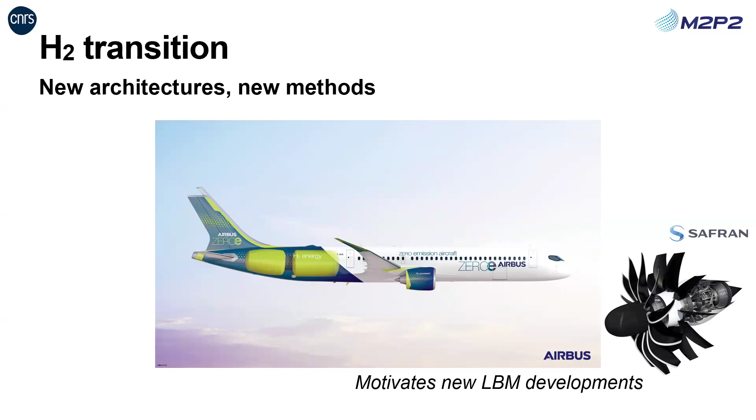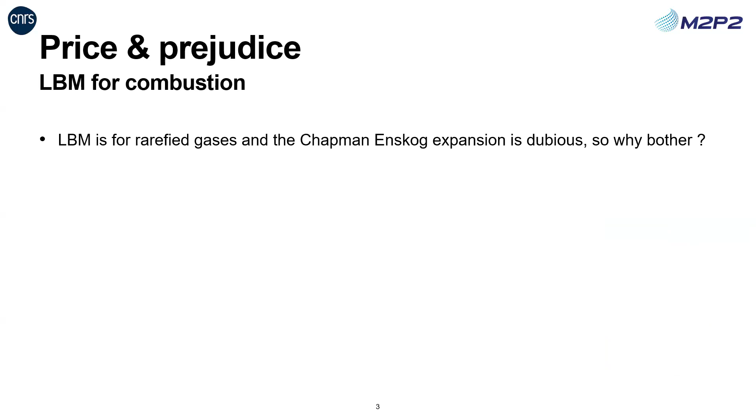Just so you know, introducing LBM in the combustion community is not very easy. So I'm showing you some of the questions I usually get from the combustion part. I'm sure that you're all convinced this is not going to be a problem. Biggest problem is the multi-component part. People don't want to use as many distributions as we need species. Typically, I'm going to show this after, but you can have 10, 20 species that need to be considered.

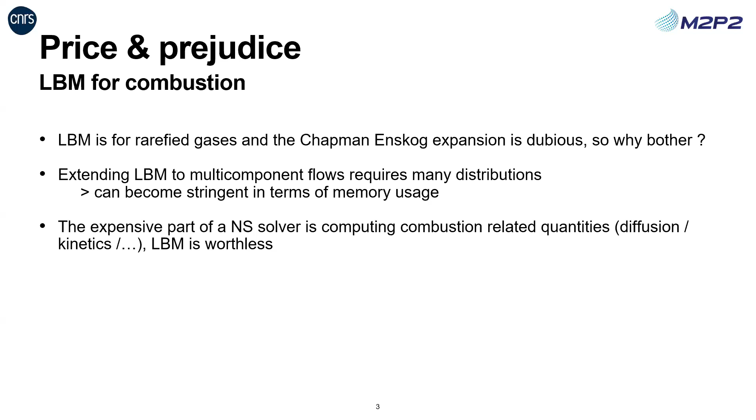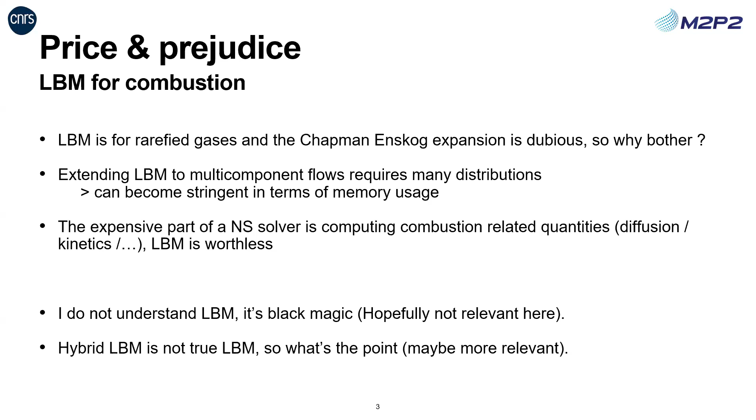Also, a lot of people in the combustion community say that, of course, the expensive part of their solver is solving, in the end, combustion-related quantities, so diffusion, kinetics, and so on. So even if I divide the cost by 10 for the solver itself, it's not going to make a big difference. This is very common, okay? Not going to comment. And this is maybe more relevant here. So I'll try to show some results and maybe convince you, maybe not. So we'll see with the questions.

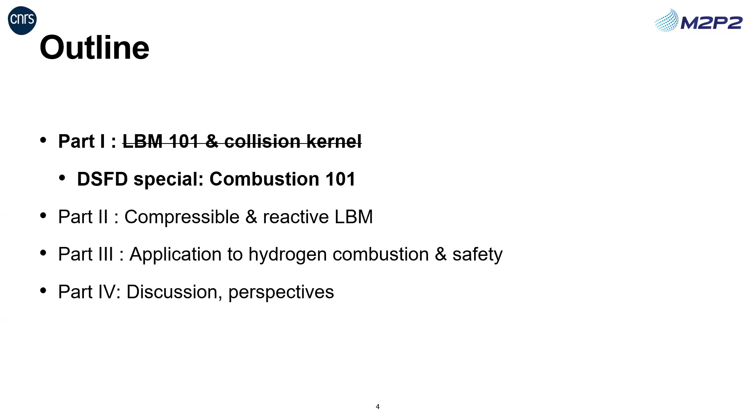So usually I start with a first section about basic LBM, but I'm going to skip it here. And I'm going to do a combustion part instead, just to introduce the equations that we need to solve any problem of combustion. I'm sure some of you know, but just in case. So this is the common equation, Navier-Stokes equation, multi-component. So we have mass equation, momentum equation. This is all the same. You're used to this, the total energy equation, and then we have species equation, which looks like that.

This is the diffusion velocity, which depends on the model, and this is a stiff source term, which we have for each reaction. Thermodynamic closure: we absolutely need, at the very least, perfect gas closure. So we need to have P equal rho T, but unlike compressible monoconstituent gases, we have, of course, a dependence of the pressure both on the temperature and also on the species.

Here I'm introducing total energy, enthalpy. These are the classical notations for combustion. Keep in mind that for combustion, Cp has to be considered dependent on temperature. It's not constant, and it depends on the species. And this is the transport closure. So this is quite classical.

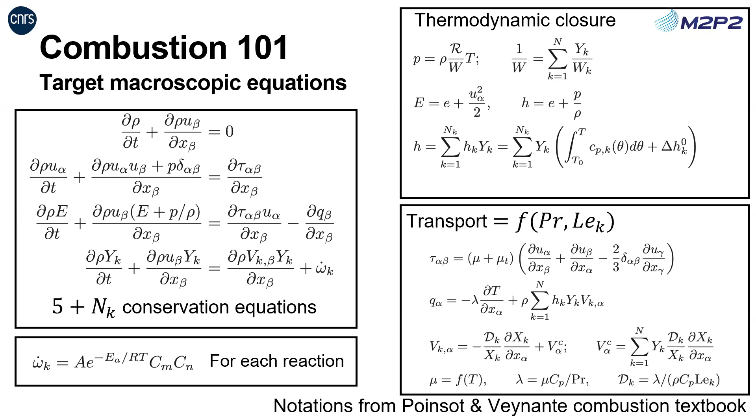Here we're going to have the stress tensor with a viscosity, molecular viscosity, which is also dependent on the temperature. Turbulent viscosity, if there is one, for turbulent applications. This is the heat diffusion. So we have a contribution of the species. Again, diffusion velocities. This is a correction velocity; this is a simple model. I'm not going to go into detail. And in principle, everything is arbitrary and we get it from tables.

So here, just the main difficulties when it comes to LBM. So of course, we end up with 5 plus NK conservation equations. So this is a lot of equations. For hydrogen, typically 9 equations. So we have 9 species for hydrogen combustion for the detailed chemistry, and that's not including NOx and so on. Large temperature and density variations. Of course, dilatable and compressible is non-negotiable, and variable sound speed is also non-negotiable.

The number of reactions can be very high, so 20 to hundreds or even thousands for detailed chemistry mechanisms, 1, 2, 3 for reduced mechanisms, but you know all these terms are Arrhenius temperature-dependent coefficients, so they're very stiff.

And for thermodynamic closure, just to mention this, we have variable Cp. That means that we have variable gamma. This is also mandatory, and we have large molecular weight differences, from 2 for H2, or 1 for H, to typical kerosene, which is going to be 170 or something like this.

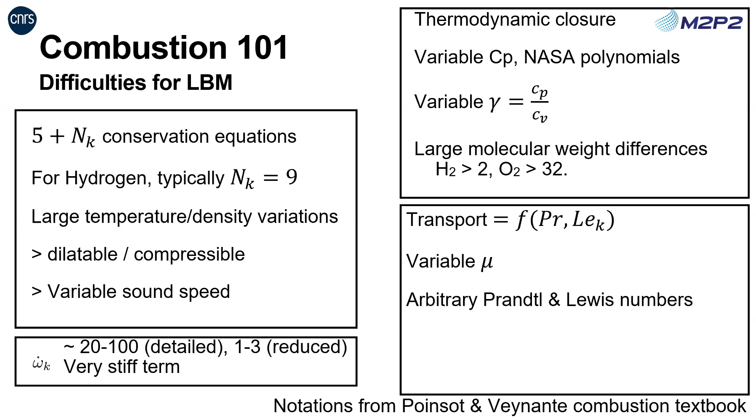Finally, transport. Again, this is all arbitrary, so Prandtl has to be tunable, and usually comes from more complex models. Same for Lewis, especially for hydrogen combustion. Hydrogen has a very specific Lewis. Hydrogen is a very small molecule, diffuses very fast everywhere, and basically changes entirely the dynamics of the flame. So you need to consider this. Okay, so I'm done with the combustion part.

Now I'm giving you the starting point of this investigation. So I work at M2P2. M2P2 is a lab in Marseille, so it's southern France. We're a member of a consortium, which is academic and private, called ProLB, which is co-owned by 2 academic labs, my lab in Aix-Marseille University and 1 lab in Lyon. And then there are 3 big industrials and CS Group, which does the industrialization of the code. So it's an industrial code. It's not as famous as the one that we saw this morning, I'm sorry, but it's a French smaller version.

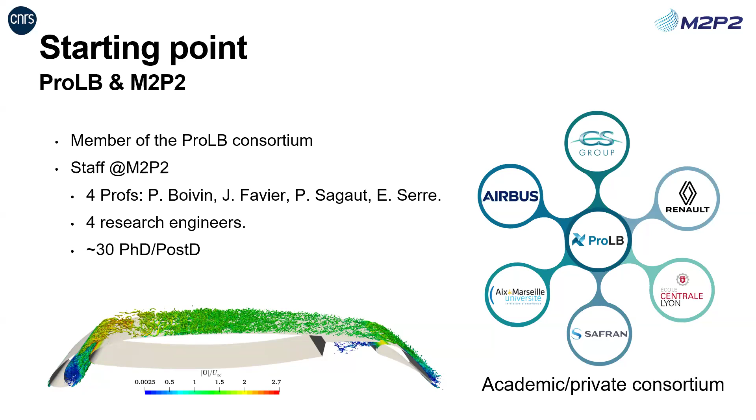At M2P2, we're 4 permanent researchers on the topic and 4 research engineers, 2 of them permanent, and there's a number of PhD students and postdocs. So it's quite an active team. So as I promised, I'm not going to introduce LBM. I'm only going to give you the basis from where we started with the team. So it's a D3Q19 standard lattice.

The code for now is CPU only, but there are a lot of actions in the CS Group to carry it to GPU. The equilibrium function is expanded to order 2 or 3 in the classical isothermal version. And the collision kernel, which is used everywhere in the code, is the hybrid recursive regularized collision kernel by Jacob, Malaspinas, and Sagaut, 2018. I'm putting hybrid in parentheses here because I know a lot of people don't like the hybrid part.

Maybe you saw Jason's talk this morning, but the hybrid part means that basically there's a weighting between the second order of equilibrium, which means the stress tensor, and one stress tensor which is reconstructed by finite volume or finite difference-like schemes, which adds some viscosity into the model, hyperviscosity. But basically, this is only used in industrial applications.

Okay, so in all of the applications that I'm going to show, the academic versions, basically anything that's 2D, we don't use that version. We just use the classical recursive regularized collision kernel. But when it comes to running a full aircraft or a full car or this or that, we use HRR. Okay.

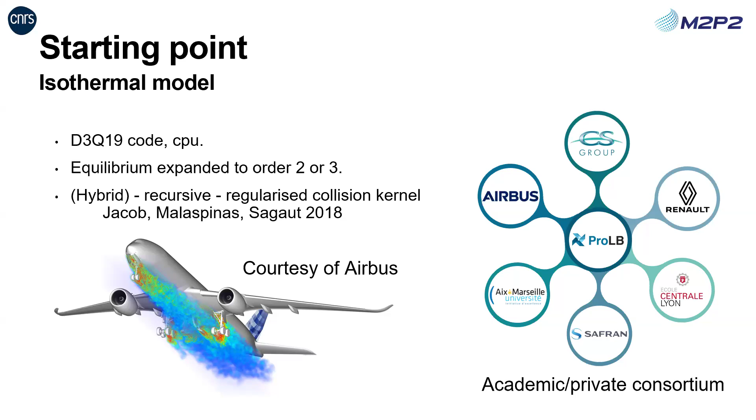Again, I'm going to focus on combustion, but in the lab, my colleagues have different expertise. I'm the only one doing combustion. Some are working on immersed boundary methods. Here we have a big collaboration with the hospital in Marseille to work on fluid structure interaction. We also have collaborations with defense for evacuation problems and pollutant dispersion, atmospheric flows, and so on. But I'm not going to cover this today.

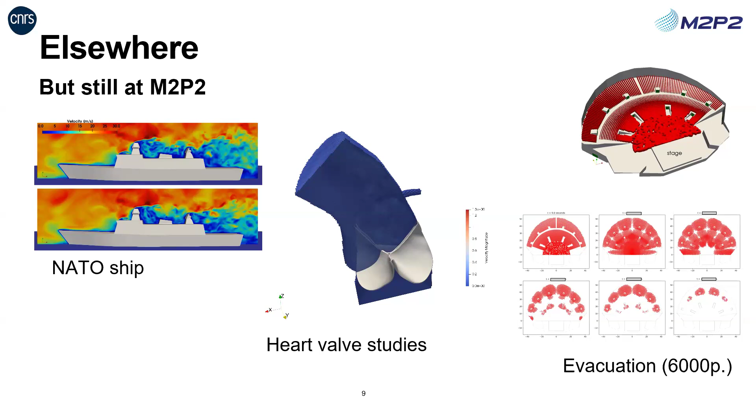So how do we do compressible and reactive LBM? I mean, this is one option. I know there are plenty of options, but I'm going to present what we did. So the problem was already mentioned several times. There are several problems, of course, but the low Mach limit problem was already mentioned several times.

One of the options is to extend the lattice, which is not the option we followed, for several arguments. First, it's quite expensive. We have some limitations in terms of gamma and Prandtl, which I said I'm not happy with for combustion. Even though you can fix that, this is not the option that we followed. But the main argument is that we have too many species, so we would end up with way too many degrees of freedom, in my opinion.

So then we have two options. Oops.

Okay, doesn't work anymore. So then we have two options. Usually we solve energy and species separately, so a lot of alternatives are available. We can either introduce them in the zeroth order of another distribution, which we saw this morning under different forms. And at the lab, we pursued a simpler, or different, option, which is to introduce additional equations only as scalars. So we're going to have 19 unknowns for the 19 distribution functions, f_i, and then we add one for energy and one for each scalar.

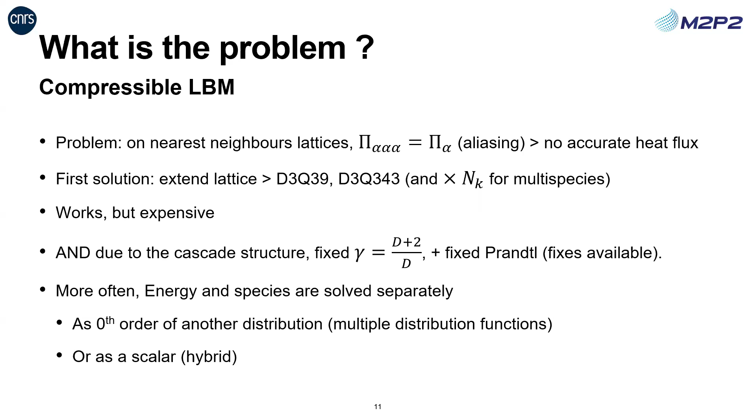So how do we do this? The idea is that we solve the scalar equation on exactly the same grid, same discretization, same octree mesh. We do explicit time stepping, so we use the same time step as LBM. And, I hope we can discuss this later, we use a very, way too simple forward explicit method for integration of the term on the left of each equation, and we discretize everything on the right using classical operators, but using as much as possible only the neighbors available from the lattice. Apart from some applications, we use only the nearest neighbors, because in terms of computing, this is quite easy.

In our first approaches, we used a non-conservative entropy equation for the energy equation and, for the combustion applications I'm going to show, non-conservative enthalpy. That means neglecting the pressure work, so we only have dH/dt plus u dH/dx. Of course, the coupling is very important, I'm going to show this. In that way, it's very easy to add any number of explicit advection-diffusion equations. This is very useful for combustion because we have a lot of experience from other codes and methods, which we can transpose very easily.

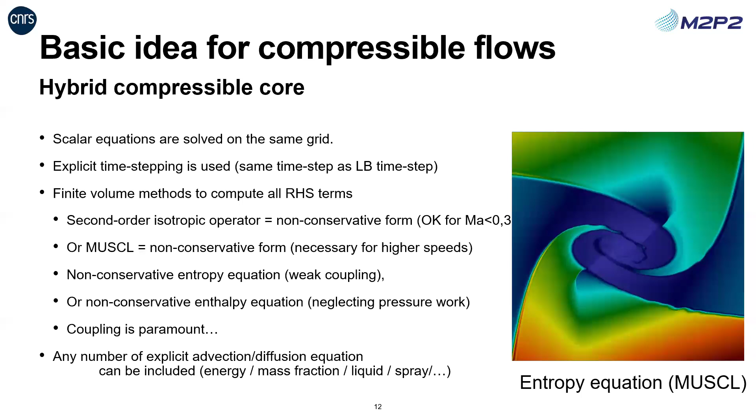So here is the main algorithm. In the end, it's very similar to classical LBM. We compute the equilibrium and non-equilibrium populations, we do the collide and stream operation, we update rho and u from f, and at the same time we compute the updated entropy, for instance, using a one-step explicit scheme. In compressible cases, we use a MUSCL-Hancock-like scheme for advection and centered schemes for heat diffusion and viscosity. That's the simplest we know. Then we do a temperature update using both rho from the LBM part and S or H from the hybrid part, and then we can update everything.

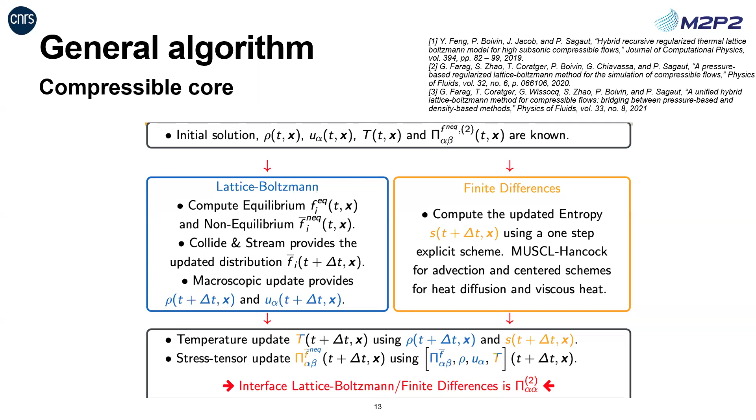And basically, we could not manage to keep a flame circle. And the reason for that, we showed later, is the fourth moment. In reality, it allows to put all of the dilatation effect into the static population, F0. In Yazan's presentation this morning, it was written differently. It was written as delta I0 times rho theta or something like this. So this is the effect of the fourth moment. We need also to be very careful with the third moment.

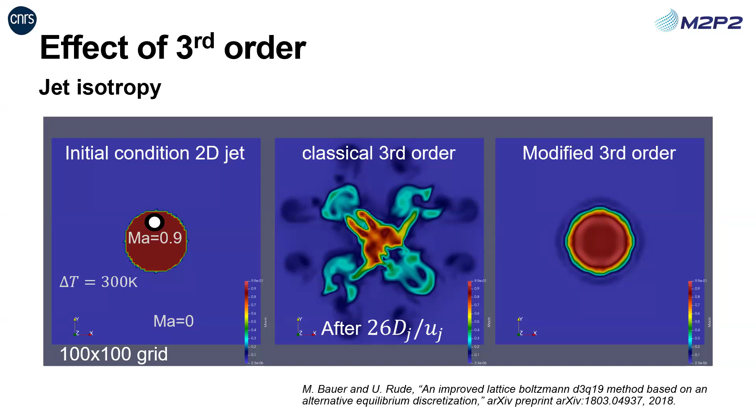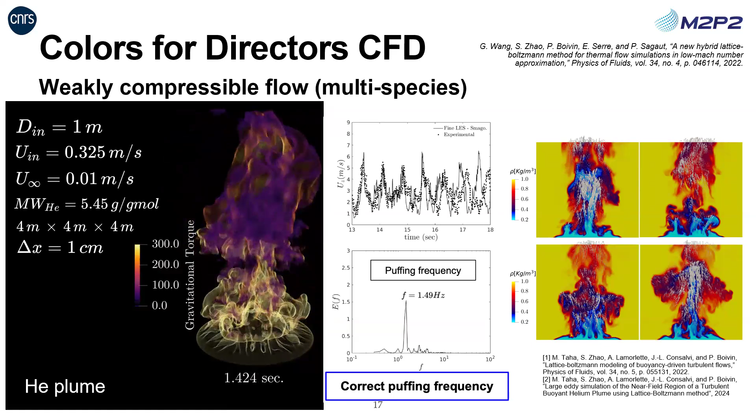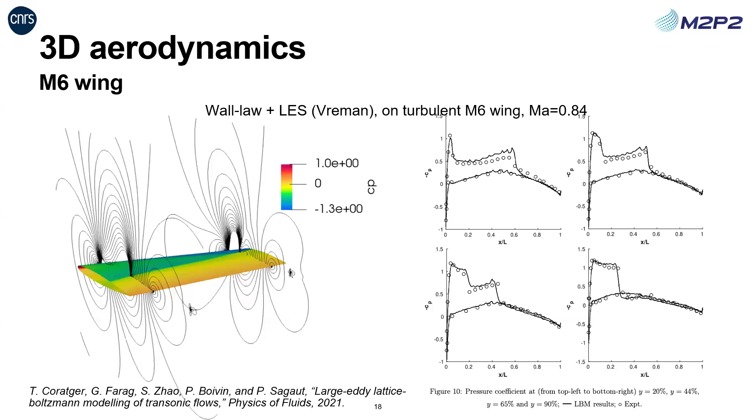Going back to compressible, these are the first results that we obtained 3-4 years ago on complex geometry. So this is an M6 wing. You can see that the CP profiles agree reasonably with the experiment, but they're not very smooth. They're not very good. So we worked again on this, and this was Iason's presentation this morning. It's another configuration, a compressible blade cascade, where you can see that we improved a lot the results, the boundary treatment, and the wall law. So this is fully compressible. This is total energy, I'm going to get there. This is fully conservative. Otherwise, we would not get the right pressure jump across the blade.

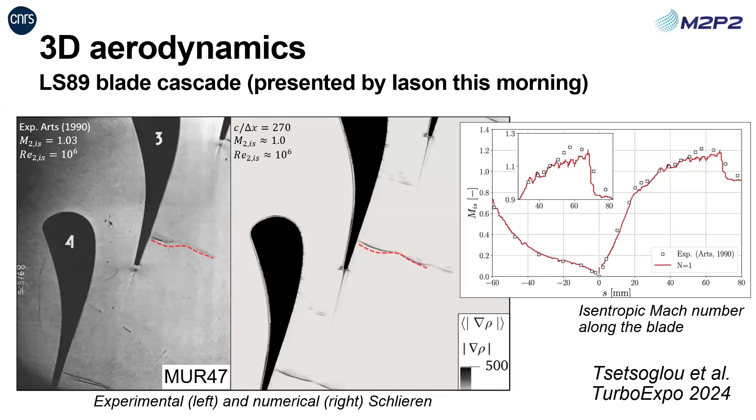So far, I've only talked about non-conservative entropy and enthalpy equations. The reason why this works, and actually I didn't show all of the numerical schemes that we used, is that basically it works with almost any classical scheme. And the reason for that is that the coupling is, in a certain sense, weak. I'm not going to say weak coupling in the mathematical sense, but it's weaker than with the total energy equation. There's no pressure work in the entropy equation, and there's no pressure work in the enthalpy equation if we neglect it.

And this means that, if we forget about the diffusive effects, we have pure advection equations, so S and H are characteristics of the system. So we can carry an entropy spot, and you know that the entropy spot is not going to trigger any other Kovásznay mode, or any other modes in the Navier-Stokes equations. So this is the reason why it worked reasonably well. But of course, and you'll understand my question from this morning in the previous talk, we don't want to use the entropy equation, because for compressible applications the entropy equation is correct on the continuous level, but it's not good on the discrete level, because what's conserved across discontinuities is the flux of enthalpy, not the flux of entropy.

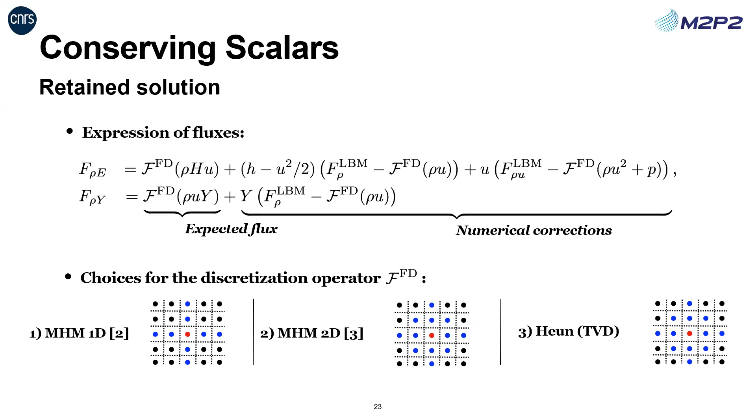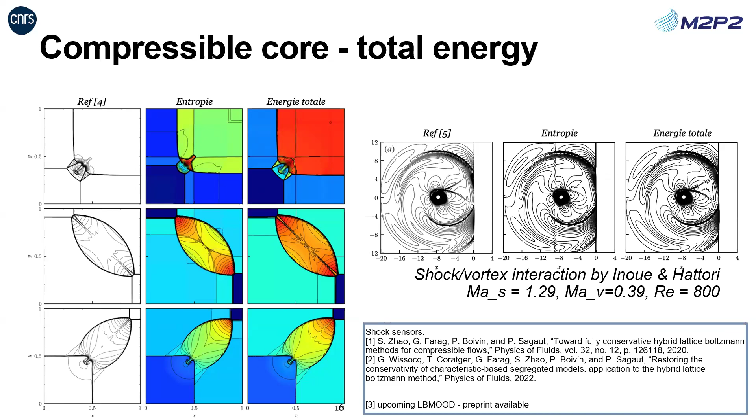Okay, now I've introduced the numerical schemes that we're going to use. As I mentioned, I'm not going to enter into details with all these problems, but hydrogen involves a lot of problems which we're interested in studying. I'm going to focus on a few of them: turbulent combustion, and combustion instabilities.

The reason why I'm going to focus on combustion instabilities is that LBM is very famous for its properties of acoustic propagation, its good properties, I would say. And combustion instabilities are a coupling between acoustic waves and the flame. So typically, we're wondering if we would gain anything from using this method.

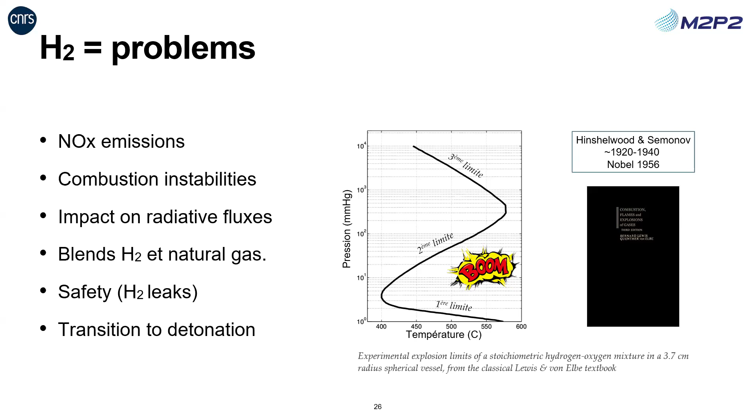So first, I'm going to show one application, which is a typical application of an aeronautical engine. You have to imagine the engine I showed earlier is a circle of this combustion chamber, and there may be 20 of these. This is a smaller combustion chamber which was developed to investigate thermoacoustic instabilities in these chambers, and also to provide the experimentalists and the code developers with a solid reference to validate the codes.

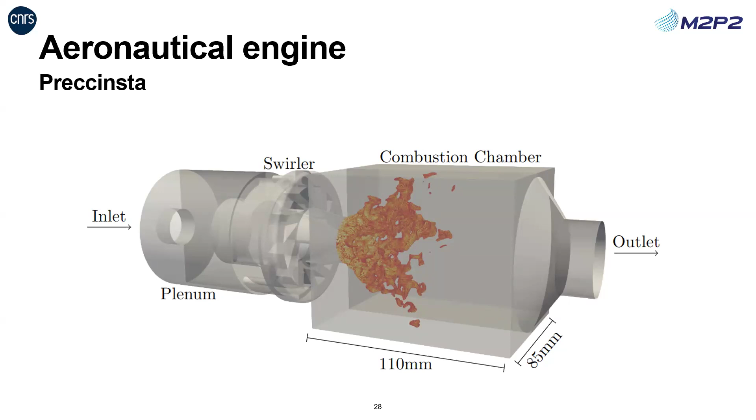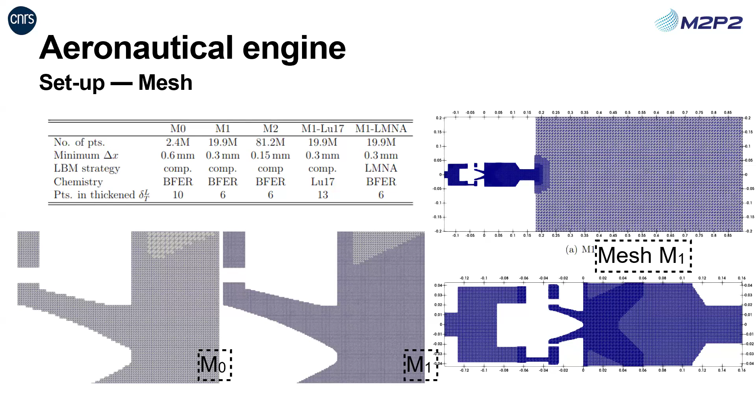So this is what the mesh will look like. This is a cut of the engine. We have a large plenum. We need to use characteristic boundary conditions. So this is quite classical, and in that case, everything is adiabatic walls for now. But these were early results. Now we can have thermal fluxes and so on.

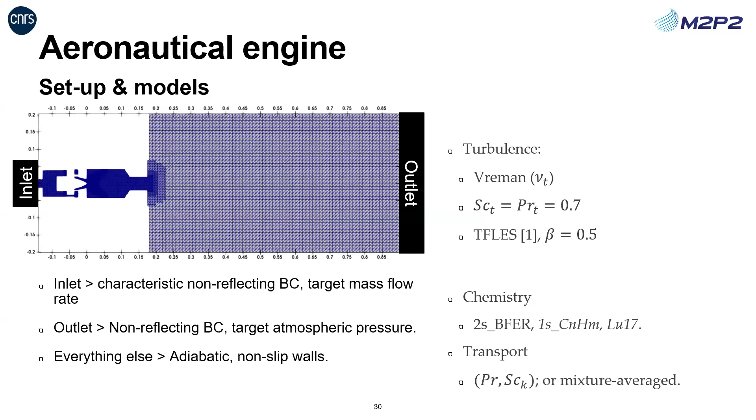So we have turbulent combustion modeling. We're going to use turbulent Schmidt number, Prandtl number, and we're going to use TF-LES, which is a thickened flame LES. So this is a turbulent combustion model which is very common in the combustion community. This is just to illustrate the results on three different meshes.

So this is expected. To get to more quantitative validations, and to show the mesh convergence, I'm showing only this temperature profile: mean on the top on several lines of the burner, and RMS on the bottom, and the results that we find compared to other codes. Of course we don't have all of the results, but we get a much more reasonable RMS level at a lower discretization. Here we already get a good RMS level at M1, which is more or less 20 million points. And this is very good compared to other codes.

Here we have a discrepancy far from the center, so top and bottom. But this is because in that case, we didn't consider heat losses. This is only adiabatic walls. So this has been corrected since.

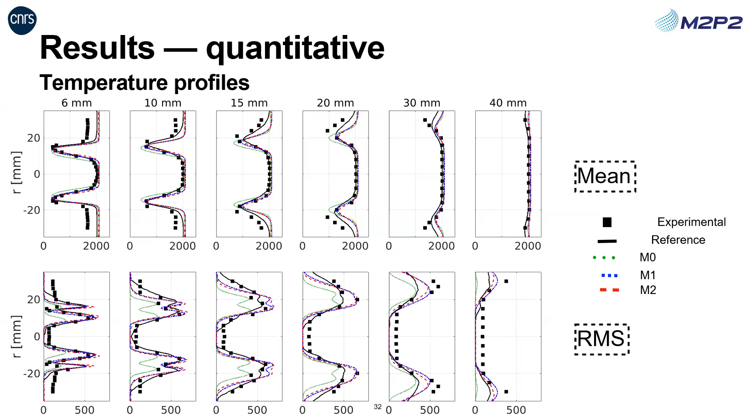So going to thermoacoustics now. As I said, thermoacoustics is a coupling between the waves emitted from the flame, typically, which are going to bounce back. In that case, we used non-reflecting walls, so there are quite few reflections. But anyway, what we want to see is how this acoustic is going to be transported, and it's going to affect back the flame and potentially make an unstable burner.

So the first thing, I think you are convinced, but in my community, I had to convince people that I had variable sound speed in the model. We're using here a simple, very canonical configuration in which we have a flame propagating against a closed wall, the closed canal, and the outlet is open to atmospheric pressure, and the flame is going to start oscillating. Since the burnt gases sound speed is much higher than the fresh gases sound speed, the frequency is going to vary with the position of the flame.

So this is a canonical validation of the fact that, one, we do get the instability of the flame. This has been simulated many times in the community. And second, that we get the right frequency. That was, of course, necessary, but mandatory to prove to the community.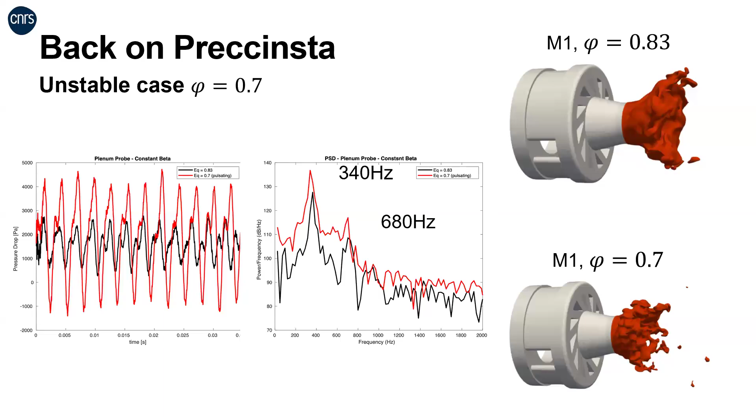Okay, going to a bit more complex. This was a challenge that was brought to us by a big industrial with a very big burner. This kind of simulation is very hard to do with a typical Navier-Stokes solver, because you have very small details for the injection, which may be a few millimeter holes at the inlet, and you have a 10-meter long burner. You know that the flame is very thin.

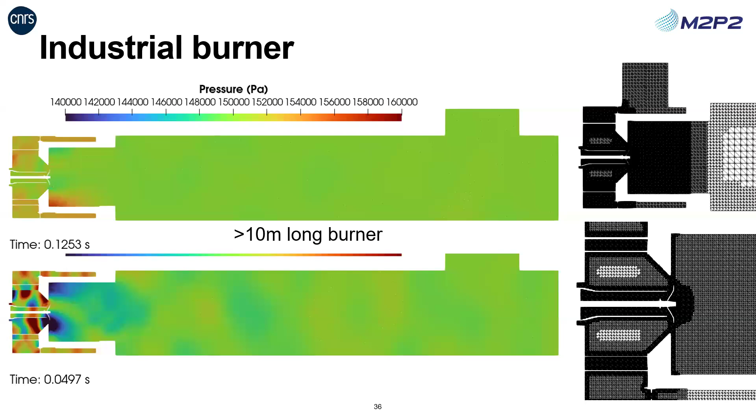So what saves us in that case is that we have most of the points in this region, but since we have a local time step in LBM for free, the small grid points don't cost anything. And this was very surprising to the combustion community. There are very few codes that do that. There's one code that's actually switching to that. You can only do that, of course, if you have an octree structure. So this is a result that we were very happy with.

So this is just another illustration. This is a pressure probe in the burner, and the burner is exactly the same in the two cases. We only change the ratio between the methane injection in the center and the flue gas around it.

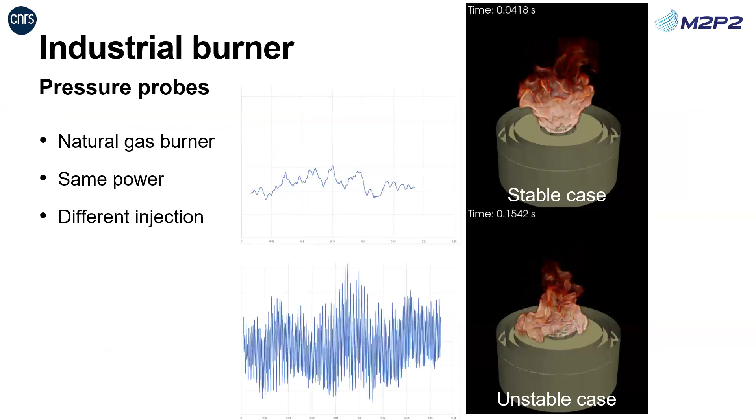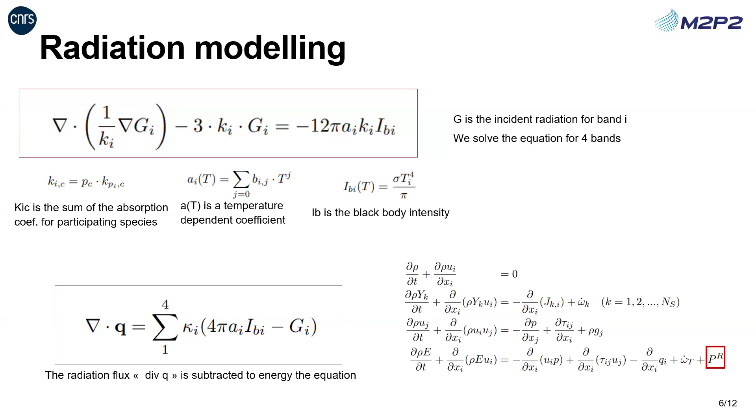This I think I'm going to skip, but I'm going to very quickly say that for very large combustion chambers, at least not the previous one, but a lot of combustion chambers, we need to take into account radiation. So we implemented simple radiation models also in the code. This is a four band P1 model for radiation. I can discuss this later with you if you're interested, but we implemented it in a local way, very friendly with the LBM code. So basically, the cost of this is, again, adding 4 scalars.

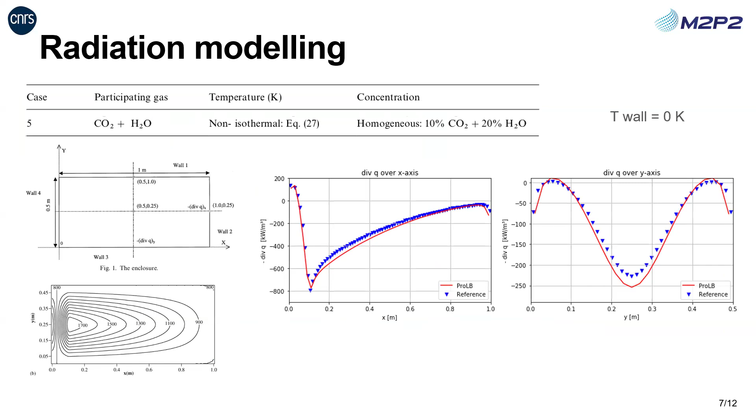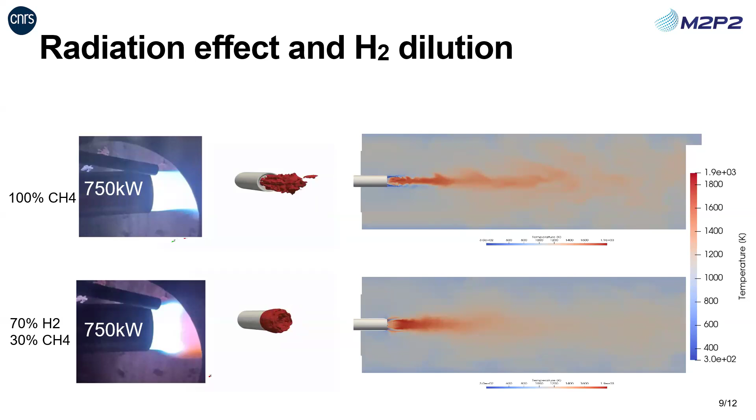And just so you know, for this kind of burner, this is a typical example. The radiation power is about 40% of that of the burner. So of course, if you don't take it into account, you're dead. And we use this to investigate the effect of dilution. As I said, manufacturers want gas turbines that can do full natural gas or full hydrogen, because they don't know how much hydrogen they're going to get in the future. So they want to do both, but they know already experimentally and also from simulations that the flames are different. So it's very hard to have a design that can accommodate both kinds of fuels.

I'm going to just illustrate this last problem because it has a lot of shocks. So here we're also investigating high pressure leaks from high pressure tanks. You know that hydrogen, as I said, takes a lot of volume. So either you store it liquid or you store it at high pressure. For cars, typically the option is high pressure, and when I say high pressure, this is 700 bars. The gas station is at 900 bars typically. So this is tremendous. Any hole is going to produce a very strong underexpanded jet, something like this.

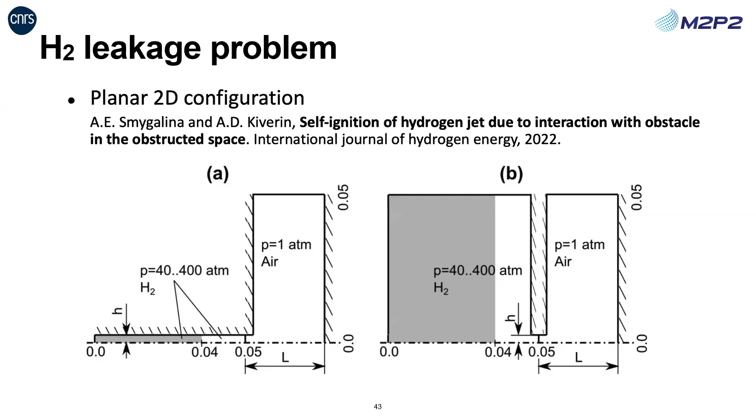And so we use also this kind of model. We actually developed also a simple 2D model to understand whether this leak just in contact with air is going to ignite or not. Spoiler alert, basically anything above 300 bars, at certain hole diameter conditions and so on, might ignite just from the contact with the air. And if you have obstacles, it gets even worse.

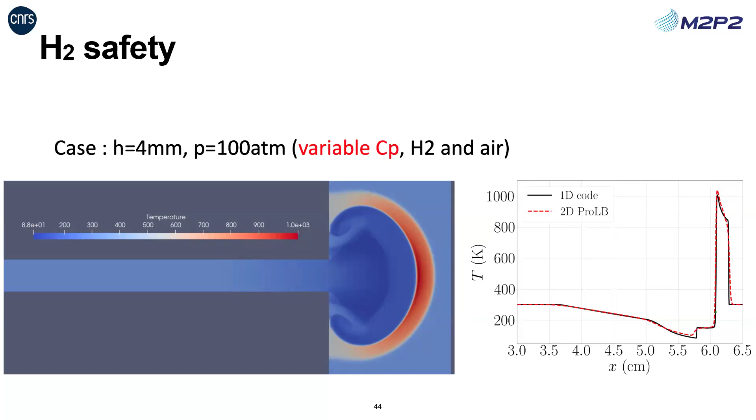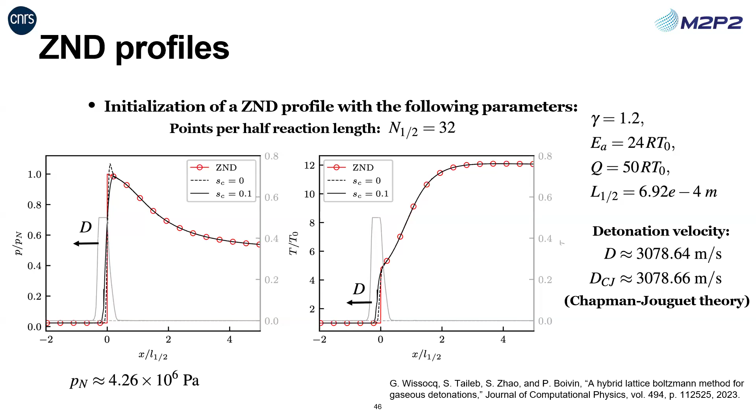I think I have 3 minutes or 2 minutes. Going to finish. This is published, so you can also check the paper, but this is basically the toughest application that we managed to do with the numerical schemes that we developed. So this is detonations. We could validate the ZND profiles, and I'm not going to enter this in detail, but basically 1D detonations show instabilities which are really hard to capture numerically.

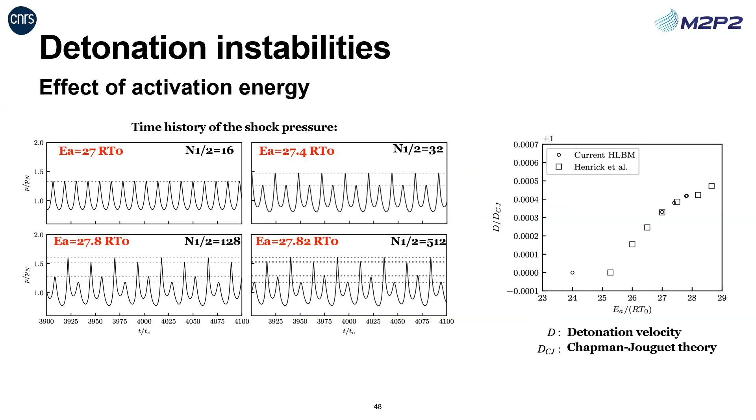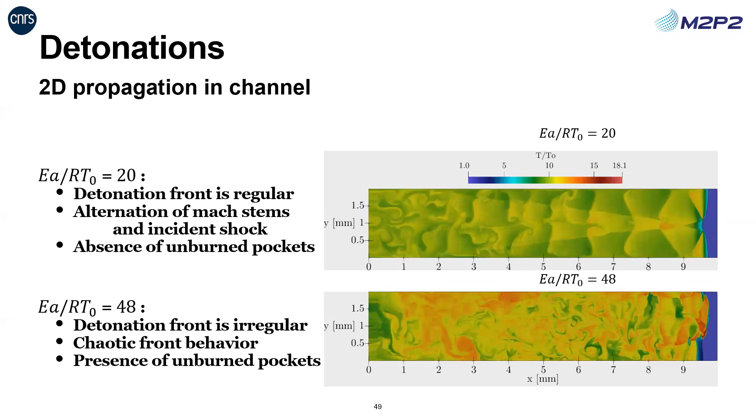And this is an illustration which we recently published of a detonation front propagating. This one is 2D. So it's D2Q9, but we're currently putting it into the D3Q19 framework. And you see that depending on the reduced activation energy, so very combustion talk, we get a very different pattern for the detonation. And this is what explains the cellular structure that experimentalists see on the side of the shock tubes. So we were also very happy with these results, especially considering the limitations of LBM.

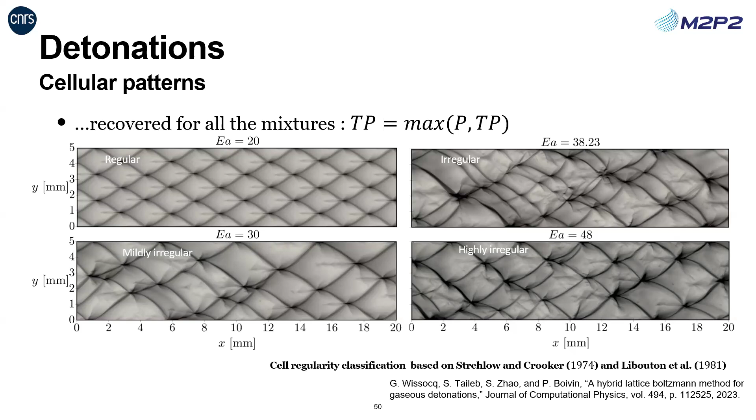Okay, so I'm getting to my conclusion. So to me, LBM is a numerical method that's now suitable for reacting flows. We've developed a fully conservative version and an LMNA version, so low Mach number approximation. I usually get the question if it goes beyond Navier-Stokes. For what we did with my team, no, I don't think so, because we solved the same equation.

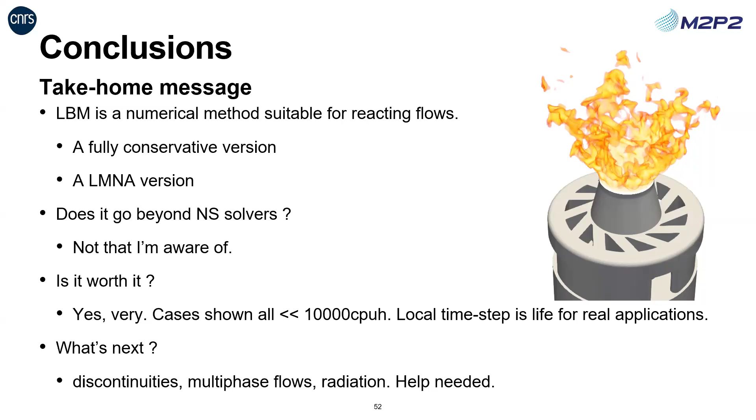Is it worth it? Yes, very much. The cases I've shown you are all under 10,000 CPU hours. So this is very cheap for these industrial cases. And a local time step is what makes the big difference in that case. So what's next? We're going to keep working on discontinuities. We already have some application on multi-phase flows and radiation.